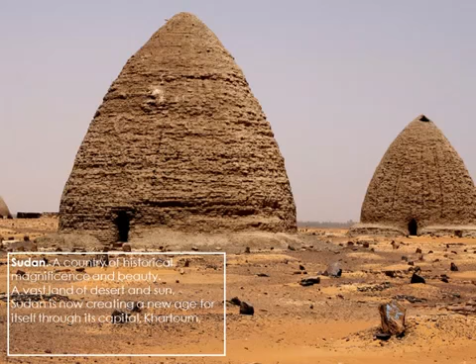Sudan, a country of historical magnificence and beauty. A vast land of desert and sun, Sudan is now creating a new age for itself through its capital, Khartoum, and the modern form of the Faisal Islamic Bank of Sudan headquarters and cultural centre.

Faisal Cultural Centre, a new cultural urban icon.

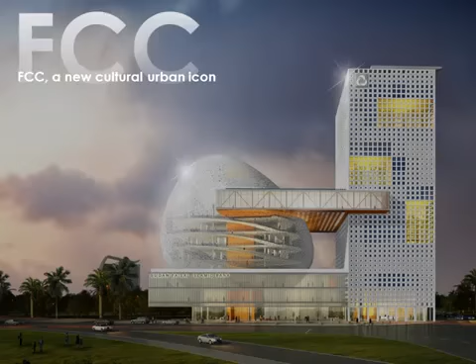The Faisal Islamic Bank of Sudan headquarters and cultural centre, located in the business district of Khartoum, is not only a representation of a global financial leader, but an ideal future in Northeast Africa.

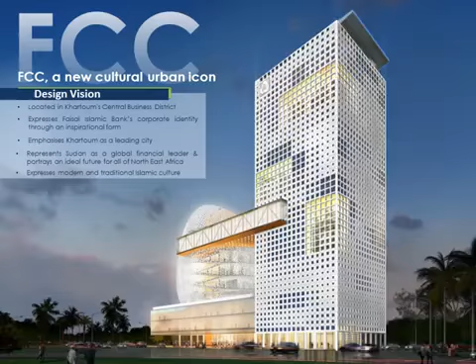The proposed architectural design expresses a vision of Faisal Islamic Bank's highly regarded corporate identity that is also inspirational and memorable to its users. Defined as a new urban icon among the financial and commercial headquarters, it will further delineate the capital as a highly visible and strategically appealing building.

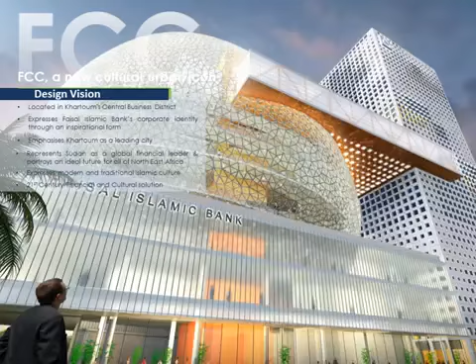As a 21st century financial and cultural centre solution, it combines the timeless image of modern architecture with a long-lasting reflection of Islamic cultural appearance.

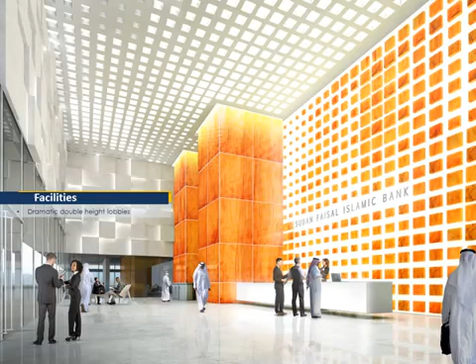The design boasts dramatic double-height lobbies upon ground-level entrance and combines the programs throughout its upper floors in a resourceful and well-planned manner. The library forms a modern institution designed for all ages and education backgrounds.

It has the capacity to expand from an exclusive research facility to an all-inclusive public resource, providing learning opportunities to not only employees but the general Sudanese public as well.

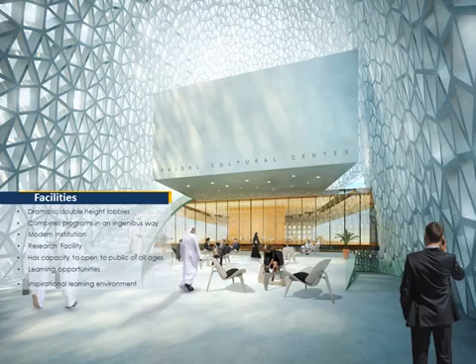The FCC looks to create an inspirational learning environment through its state-of-the-art building and integrated traditional and up-to-date design elements. The library responds to the digital age challenge while being publicly accessible to all users.

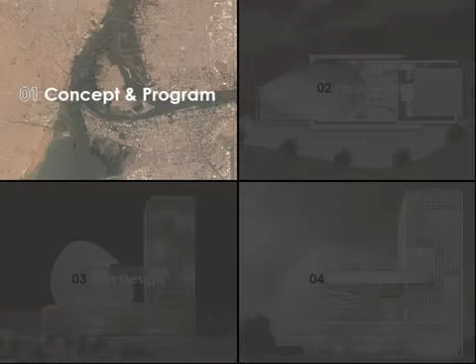The white and blue Niles, the dominant geographic feature of Sudan, converge at the spot where the Faisal Islamic Bank of Sudan headquarters and the FCC site are located.

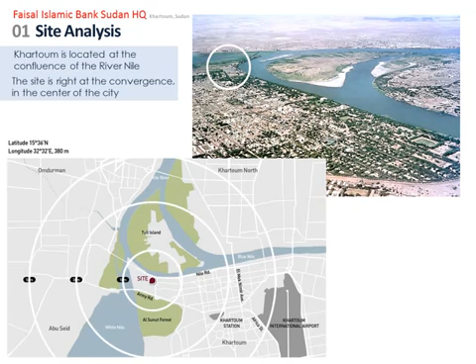The project site is to be in the central business district area of Khartoum and is expected to have good access approach as it is situated in close proximity with the main transportation links.

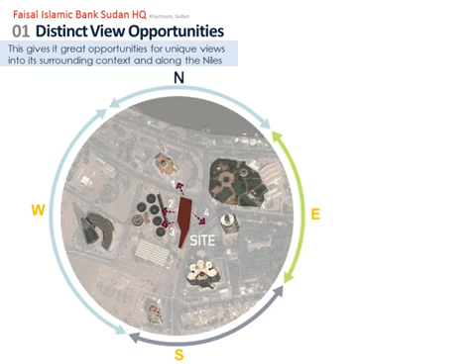The site is surrounded by the most renowned and leading modern architecture of Khartoum. FCC's office tower is open towards the northeast view where no high-rise buildings exist but the People's Public Garden is sited. This provides distinct view opportunities for its employees as they directly face the Blue Nile from inside.

The current views show the great potential this site has.

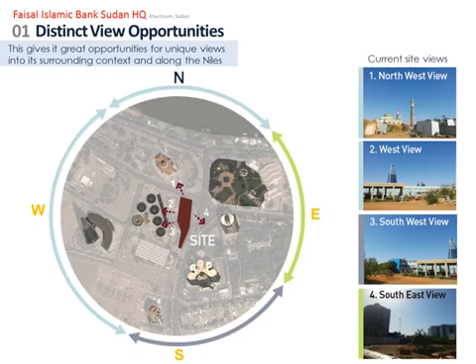The design of the bank and FCC are to be seen as a corporate icon traced into the surrounding central business district skyline and aims to become a notable feature within its respective urban settings.

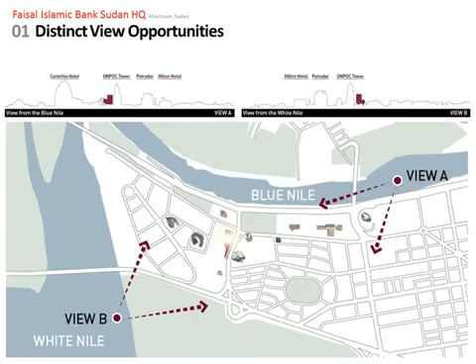An open rooftop above the conference hall takes advantage of these views, particularly to the White Nile, whilst creating a unique and dramatic setting.

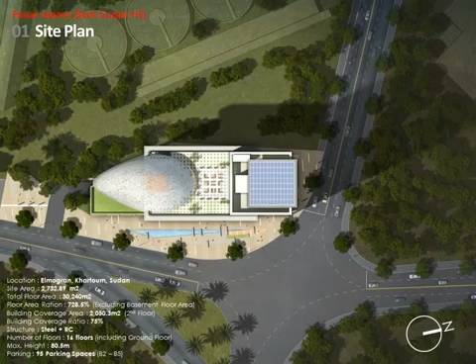The siting of the Faisal Islamic Bank, located at a large intersection where Gamma Avenue begins, is strategically significant within the expanding Khartoum business district, as it is in close proximity to the El Shahid Mosque and other financial and commercial headquarters. The site has an area of 2,733 metres, with a total floor area of 30,240 metres.

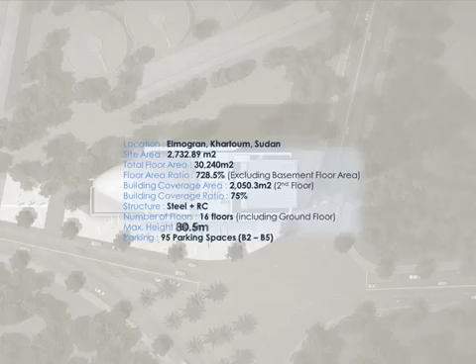This puts the building ratio at 75% for its 16 floors. The office tower reaches 80.5 metres high above ground level, with 95 parking spaces available below grade.

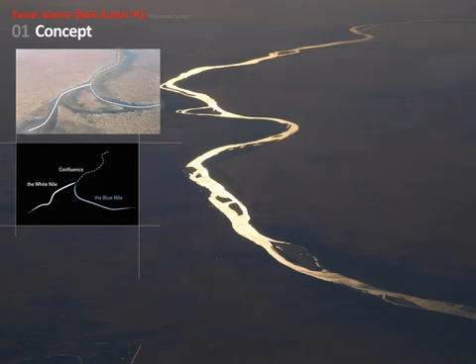Similarly to the two Nile rivers, the Faisal Islamic Bank and FCC are designed as two separate entities which converge into one. Their programs are separated within the two forms, the office tower for banking and business, and the cultural centre for learning and education.

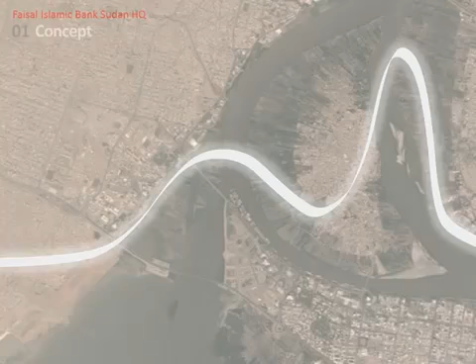Between these different forms hangs the bridge and podium, where the confluence of the programs merge between public and private. The form derives from its surrounding conditions. The Great Niles, convergence, and the Islamic context create visual and subtle links to the form of the FCC.

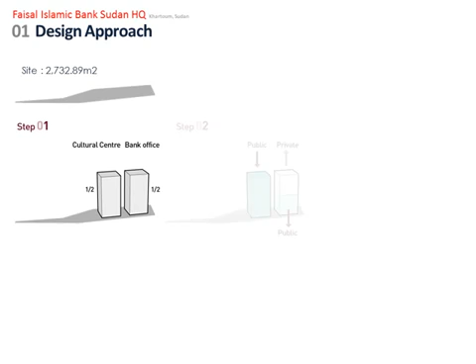The design responds to the local external environment whilst considering an architectural function of the program and providing modern comfort to the end users. The strategy of this project is to develop and create a sustainable modern approach to its environmental efficiency and programming.

The Faisal Islamic Bank and FCC are mainly composed of two masses connected by another linking object which bridges these forms. The libraries and auditorium are contained within the rounded form of the first mass, indicating inspiration and innovation in knowledge and learning, whilst the modern tower form holds the more corporate business and banking offices.

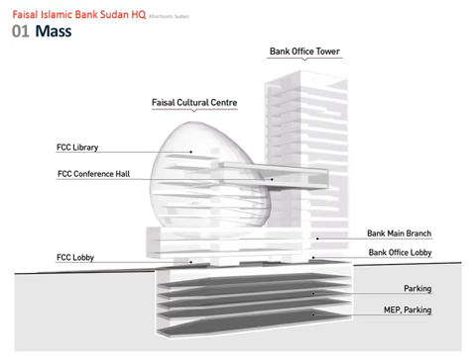The connection levels provide space for the conference hall and eating areas, which can be opened to provide shaded outdoor seating. The separated circulations for the two distinctive programs, Office and Cultural Centre, are designed to better accommodate the user environment.

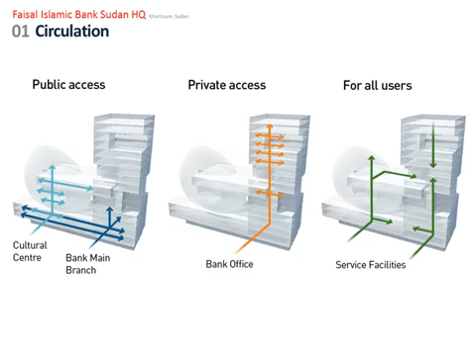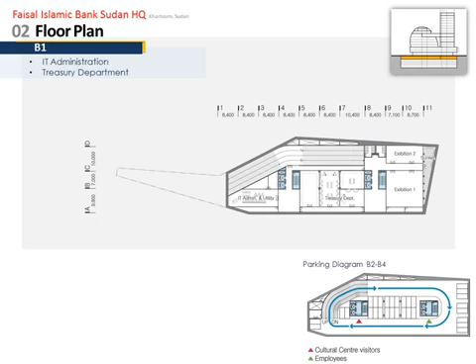The IT administration and Treasury department are provided on the first basement floor as required. Exhibition rooms and storage are also located next to the void area, open to the ground floor in order to create a pleasing environment and diffuse natural daylight, suitable for exhibition installations.

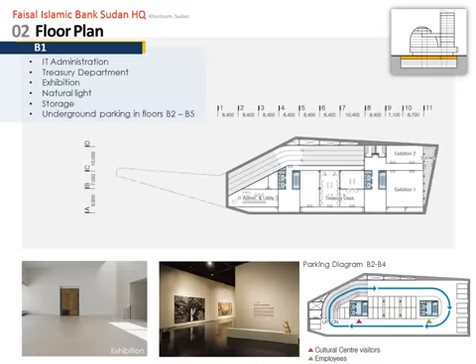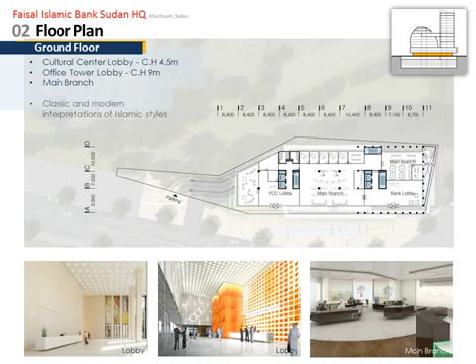The first floor provides a blend of programs which can be accessed through either the Office Tower or Cultural Centre. The Business Centre is located as part of the FCC, but designed to be used freely by both entrepreneurs and the public. The adjacent prayer room, facing in the direction of Mecca, can equally serve all users.

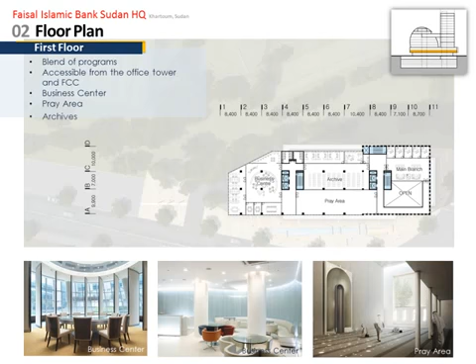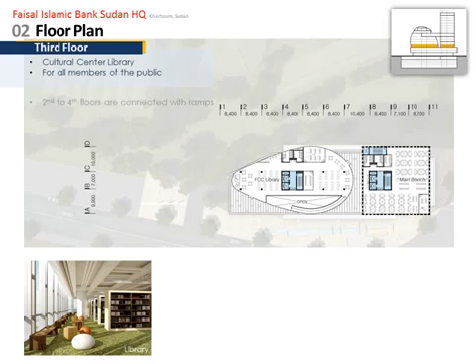The Cultural Centre Library is designed as an innovative and inspiring hub of learning for all members of the public. From its second to fourth floors, the levels are connected with gently sloping ramps around a crescent-shaped void, providing immediate visual orientation to all the library's activities, as well as working to bring natural light deep into the interior spaces.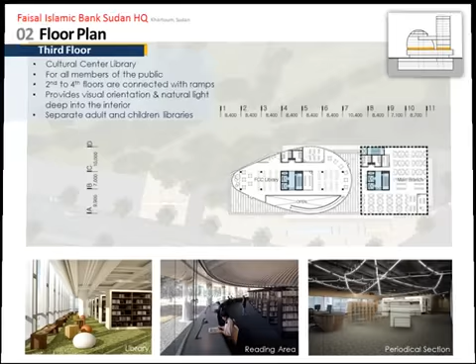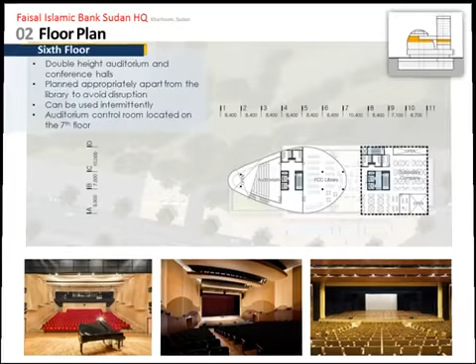Double-height auditorium and conference halls can be used intermittently and are planned appropriately apart from the library zone in order not to interrupt other activity movements. The conference room supports a flexible layout system which can be used to accommodate functions in various arrangements, such as conference or banquet layouts. Sufficient resting area is provided outside the conference hall with large windows giving panoramic views.

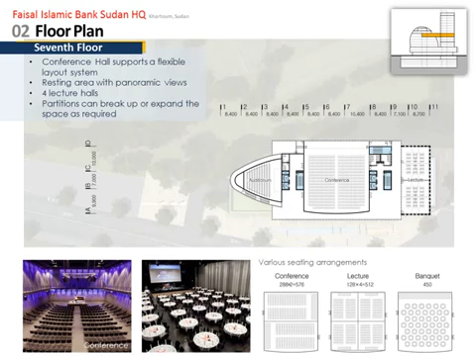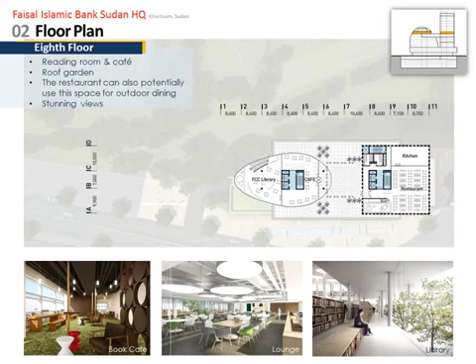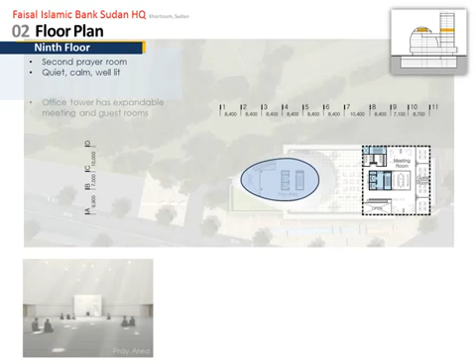Prayer rooms are distributed across 2 floors, the 1st and the 9th, for good accessibility. The prayer room on the 9th floor of the FCC ensures a quiet and calm environment adequate for praying, whilst the office tower contains meeting and guest rooms.

Certain office floors include void areas open to the levels above. This allows for increased natural lighting and a higher quality working environment. Executive and director rooms are provided on the very top floor, ensuring full views along the Blue Nile.

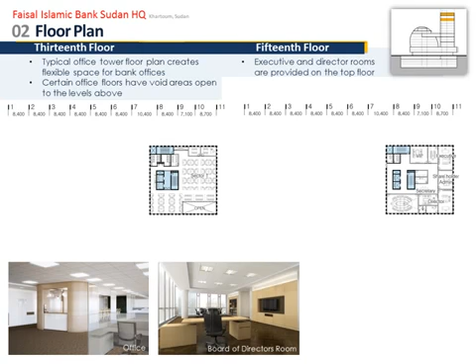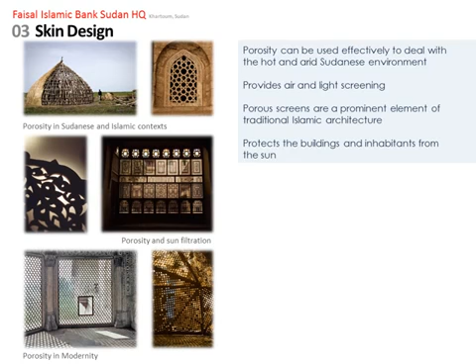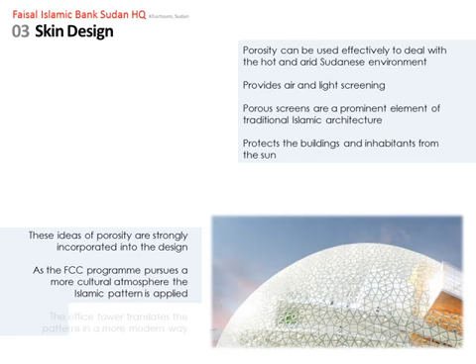Multiple variations of the concept porosity, which produces positive effects appropriate for the Sudanese environment, are implemented into the proposed design. The porosity theme is interpreted differently in the 2 different masses. For the FCC, as the programme pursues a more traditional and cultural atmosphere, the Islamic pattern is applied, while the facade of the bank office is translated in a more modern way.

Advanced technologies and materials are combined to create architecturally detailed and sustainable envelopes. Low-E, frit and U-glass are all used to create protection from the hot climate whilst allowing daylight into the interior.

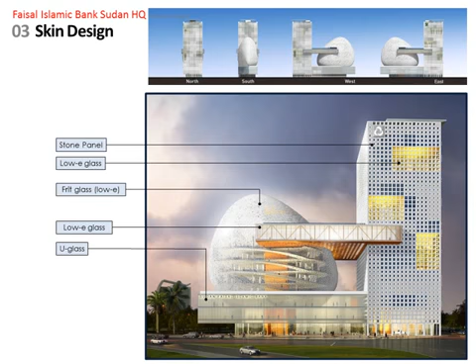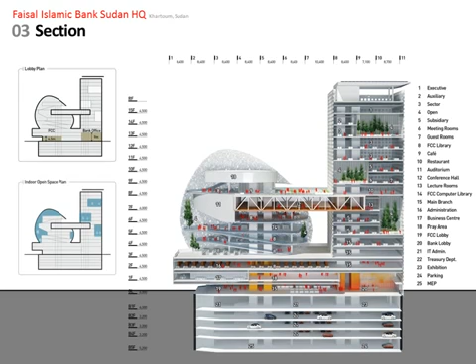The Faisal Islamic Bank and FCC are carefully designed to combine its many programs and users in an intuitive and realistic manner. 2 separate lobbies are provided, one for public use and the other for employees and bank users. Void spaces are left open throughout the building section to allow for a higher quality interior environment and full use of natural daylighting.

The office tower uses custom unitized windows, which are constructed primarily of double glazing with an integral sunshading system in between. This creates a suitable interior environment whilst giving the tower its modern facade design.

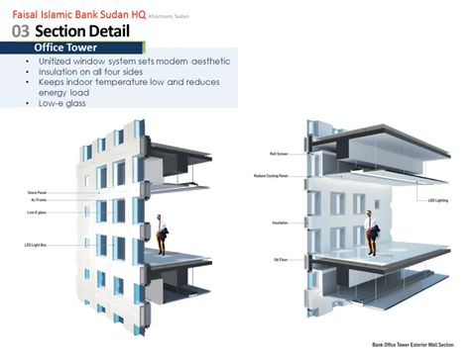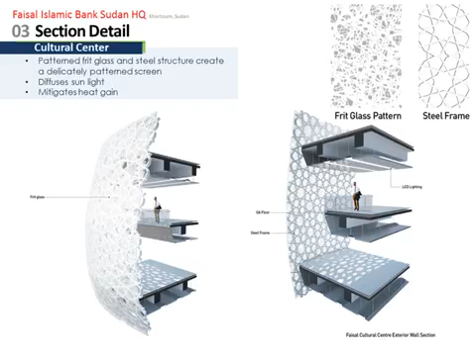The sophisticatedly designed envelope of the cultural centre grants economic benefits by saving energy, as the layers of Islamic pattern structure formulate small apertures that diffuse the daylight and mitigate heat gain. The delicate facade also sets the indoor quality as the natural lighting becomes milder, providing a soft and pleasant interior ambience.

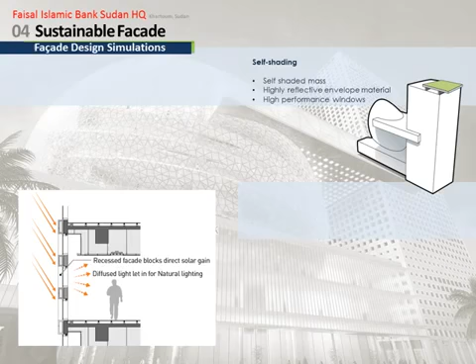The facade simulations led the design of the building through analysing its daylight, solar radiation, CFD and shadow properties. Our sustainability strategy for the implementation of a green building includes integrated design, save energy and green place. All of the green design strategies applied to the Faisal Islamic Bank will help save energy and minimise the environmental impact.

A self-shading mass, highly reflective envelope material, horizontal and vertical louvers, blinds and high-performance windows will all provide decreased cooling loads during the summertime.

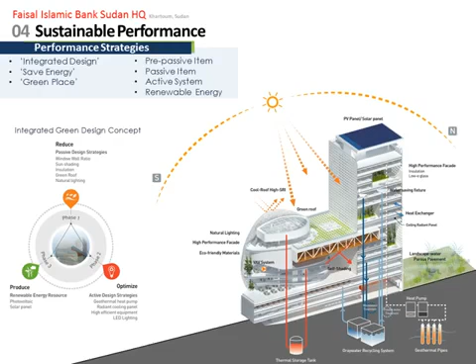Various structural systems will be in place for the different building's masses. These will include building frame, truss and a special system for the dome of the conference centre.

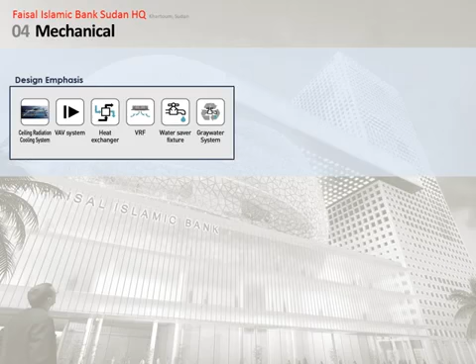The mechanical system sets its emphasis on environmentally friendly and low-energy optimised performance systems. Primary heating equipments and air conditioning services have all been carefully considered, whilst the building uses an easily maintainable automatic system and digital broadcasting service.

After consideration, the civil and construction work has been chosen to use a diaphragm wall as a retaining method, a strut system as the lateral support, and bored piles for the foundations.